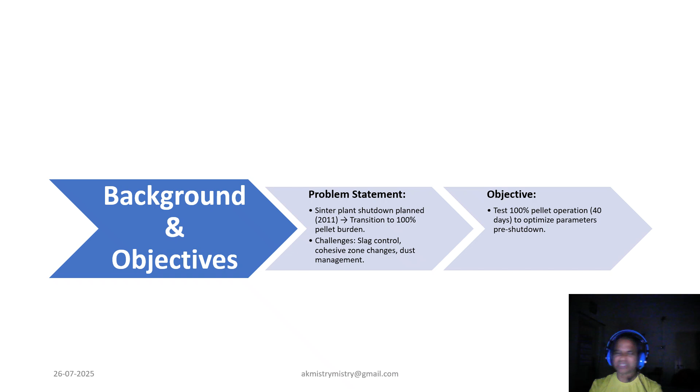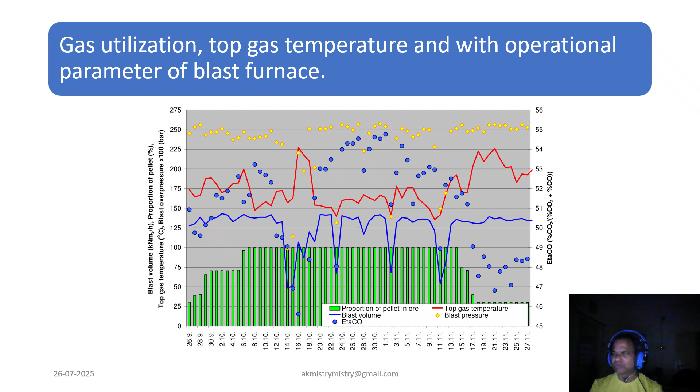Our goal was to test 100% pellet operation for more than 1 month and fine tune parameters before making it permanent. Now, coming to the trial period outcomes, as you can see, during the trial we closely monitored the gas utilization and top gas temperature. These were the key indicators of furnace performance and helped align operational parameters for optimized efficiency and heat distribution.

Now, it is very important to see the challenges. Unless we differentiate the composition of the sinter and pellet, we could not trace the challenges. Hence, it is essential to share the compositional variance of the burden components. One of the most striking differences between sinter and pellet, as shown in the slide, lies in the composition. As I have mentioned, pellet offered higher Fe content, around 66% and more, compared to 61% in sinter. Of course, it's higher compared to the usual content of sinter, and a much lower FeO.

Now the basicity dropped from 2.19 to 0.23, as shown in the slide, necessitating the use of direct slag formers like limestone and BOF slag. So this also gives us a learning that when we concentrate on a burden matrix of higher pellet percent, basicity becomes a challenge, and we have to acquire some basic components like LD slag or limestone to tune our slag basicity.

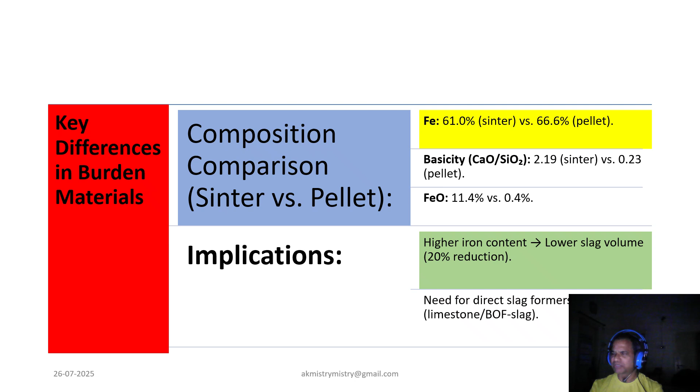Now, coming to the operational transition, which is also a very important point. The transition is not abrupt. This is also a learning point: when we transition to a higher pellet ratio, we need to go through a small quantum first and thereafter ramp up, so that you can tune the distribution, the utilization, top temperature and the wind acceptance, as well as have time to see what's going on with the quality, whose reflection gets translated in our dust catchers and clarifiers, that is, the sludge outcome, and it can also guide us on what sort of quality of pellet we are handling in the furnace.

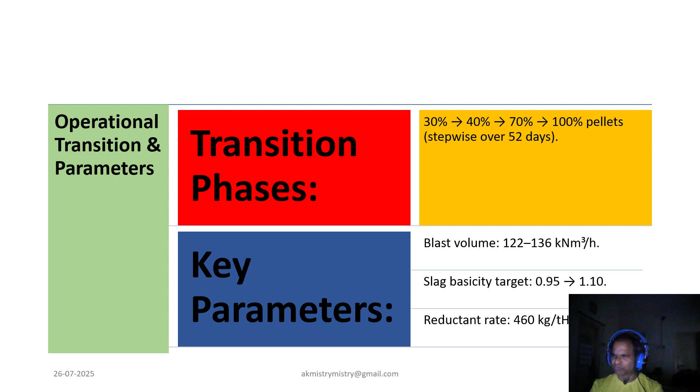So the transition is not very abrupt. When we ramp up, it's quite needed that we go from a small quantum to a higher quantum, as shown in the slide: pellet use increases from 30 to 100% over more than 40 days. So we have to keep blast volume within a stipulated band, which also ensures the stability of our blast furnace processes. Also, the target slag basicity lies from 0.95 to 1.1, and it is achieved with a reductant rate of 460 kg per ton hot metal, as shown.

Now coming to slag management, which is supposed to be the biggest challenge. As expected, slag volume dropped significantly to around 170 kg per ton hot metal. However, alumina content rose due to reduced slag volume, which was well anticipated by the operator when we go from sinter burden to pellet burden, especially towards 100% pellet use. Now, sulfur distribution improvement is seen, as also shown in the slide. The temporary FeO spikes during cold working reminded us to stay cautious and adaptive, as this information is shared in the slide.

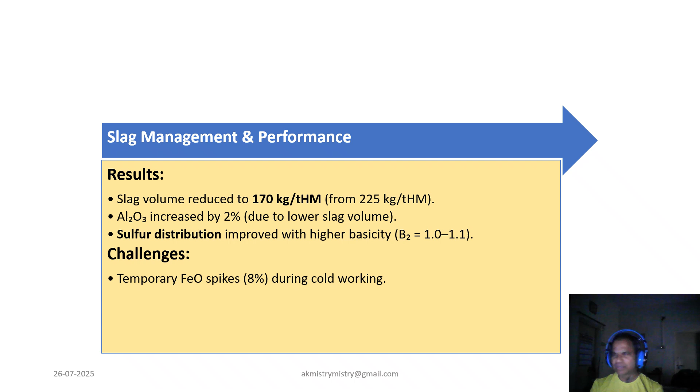Now coming to the most important aspect of efficiency, that is gas efficiency. Efficiency saw a notable boost, hitting around 54%, well above our baseline of 50%. So during this use, utilization went up by 4%, and this gives us a lot of benefit in terms of fuel saving. It is also seen that post shutdown, the top gas profile shifted to an inverse V shape, which came with a trade-off like increased wall heat losses due to changes in the cohesive zone from the higher pellet use.

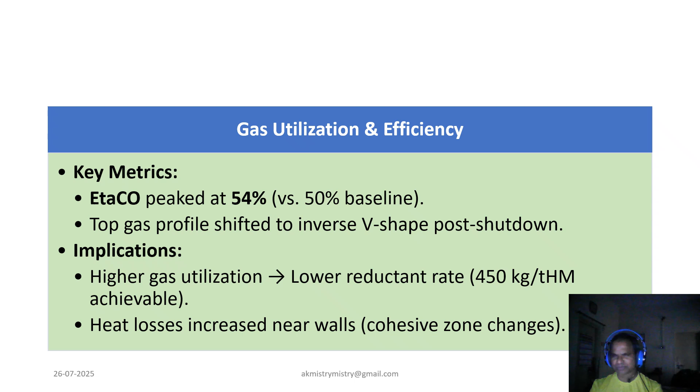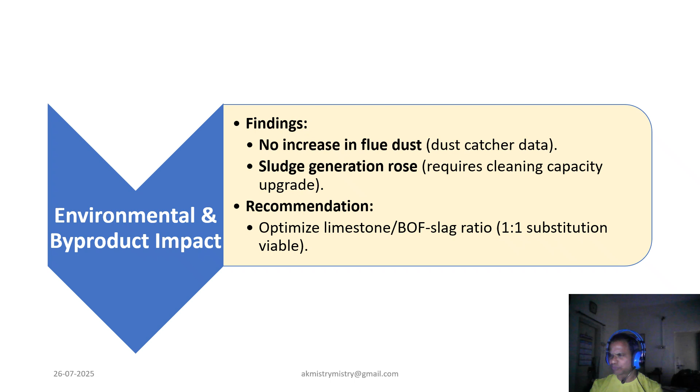So now coming to the environmental feedback of the trial. Environmentally, the trial was very encouraging. The flue dust level remained very stable. The sludge generation increased slightly; in the next presentation we will share the intricacies and hidden facts of this, as this will go very long. This suggests a need for enhanced cleaning capacity. On the material side, we recommended a 1:1 limestone to BOF slag substitution ratio to maintain basicity without overloading the system.

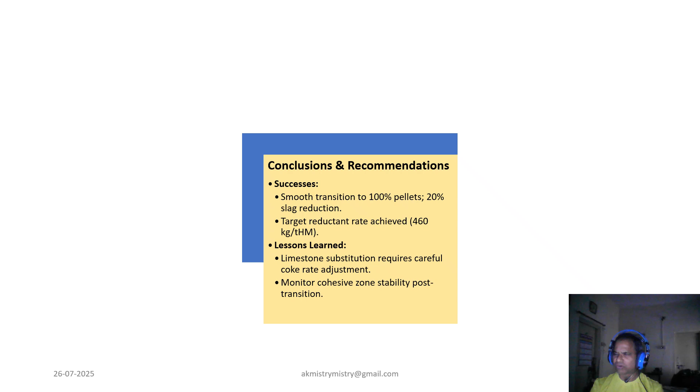So in conclusion, the transition to 100% pellet was smooth and strategically successful, which is evident from the gradual top temperature trends and utilization trends. This also tells us the transition was very stable, with a 20% drop in slag volume and a reductant rate of 460 kg per ton hot metal as the final outcome. However, limestone substitution must be carefully balanced to avoid unintended impact on coke rate, and post transition, it's crucial to keep an eye on cohesive zone stability to preserve furnace health.